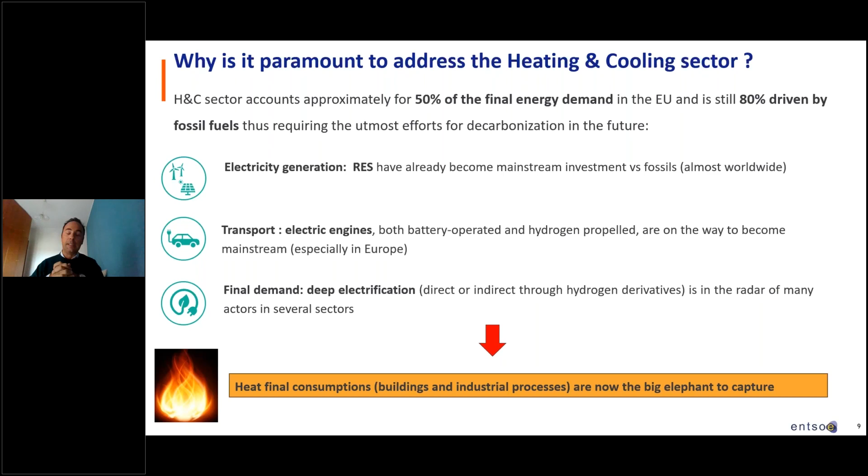If we move to the next slide, another important point I would like to highlight regards the synergy between the heating and cooling and the electricity sectors, also in terms of services needed by the power system, in particular for flexibility. If we put this under a future perspective of an integrated energy system, a system of systems for the future, we can see interactions between the power and heating sectors, in particular from electrification of heating systems, which implies electric load increase and load profile modification, but also opportunities in the form of flexibility provision through demand response and exploitation of the intrinsic thermal behaviour of heating and cooling systems. Thermal storage systems in specific applications can ensure medium-long term duration flexibility at the energy system level.

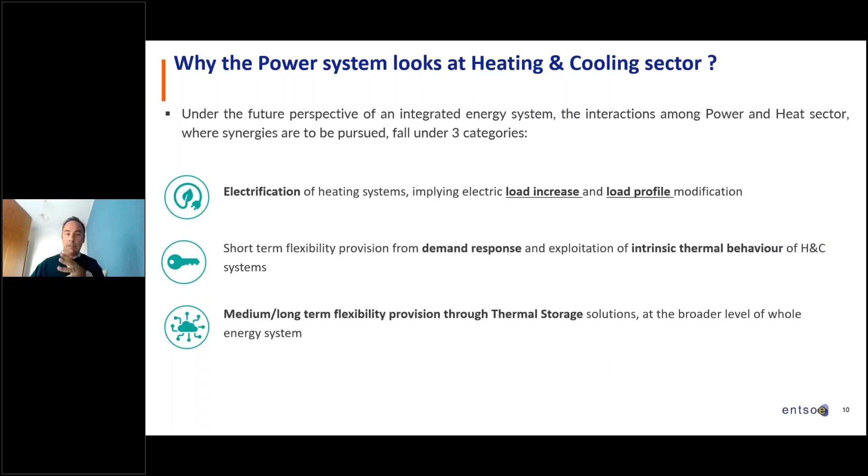If we move to the next slide, we have mentioned flexibility. As you can understand, one of the key points for the future is the contribution that such services will give to the system in terms of flexibility. In a full carbon neutral system, it will require large scale flexibility, both in terms of short and long duration flexibility. This is another aspect that will be further highlighted in the presentations that will come from the speakers ahead. But the point of flexibility for the future is something crucial that needs to be addressed.

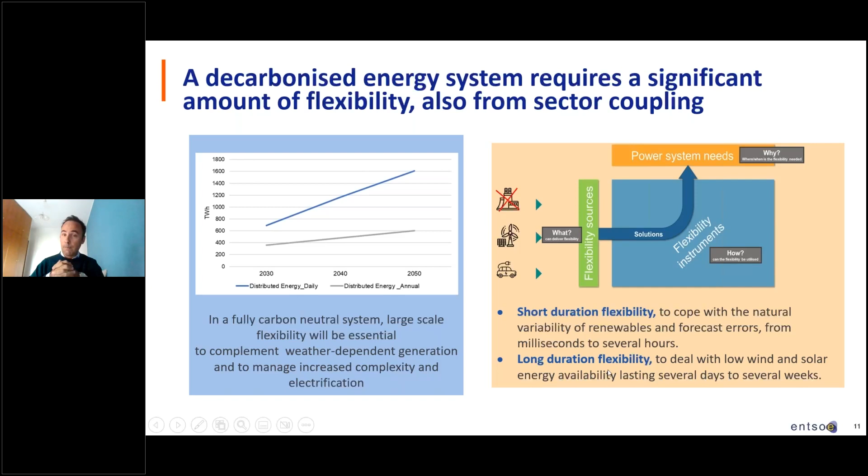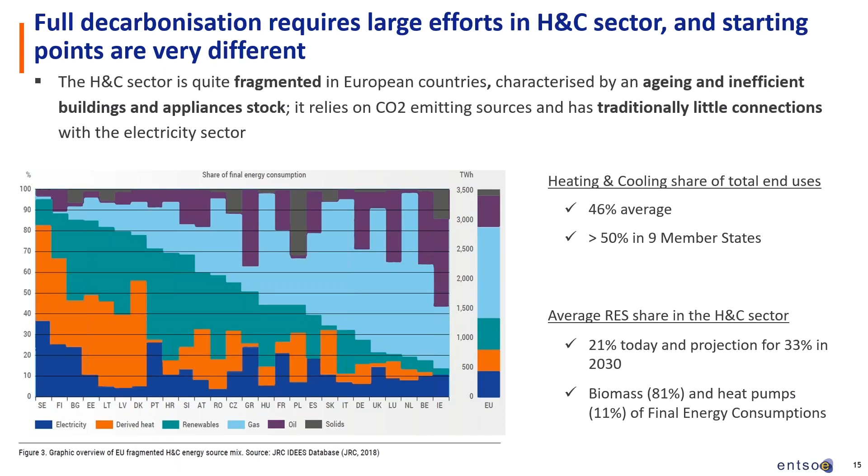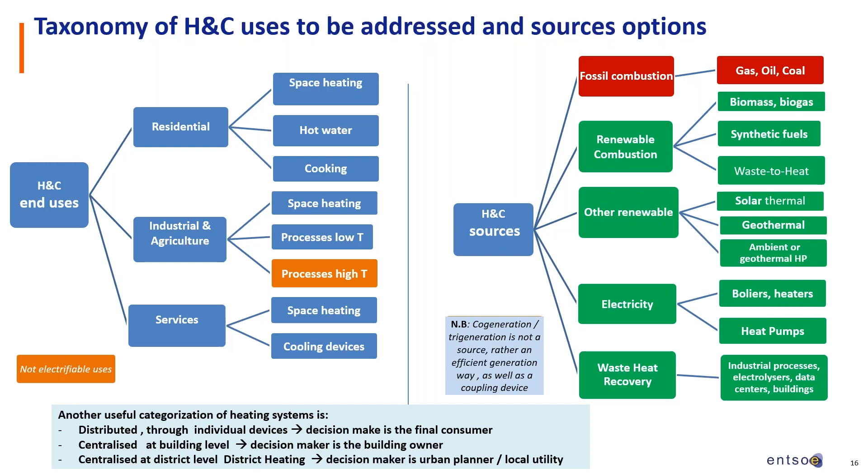In the position paper and some of the annexes, you will find a lot of data analytics about which final users and which sources, according to the previous taxonomy. We see that the two most important ones are space heating of buildings and industrial processes, which have very different characteristics, so they deserve different treatment and different processes for decarbonization.

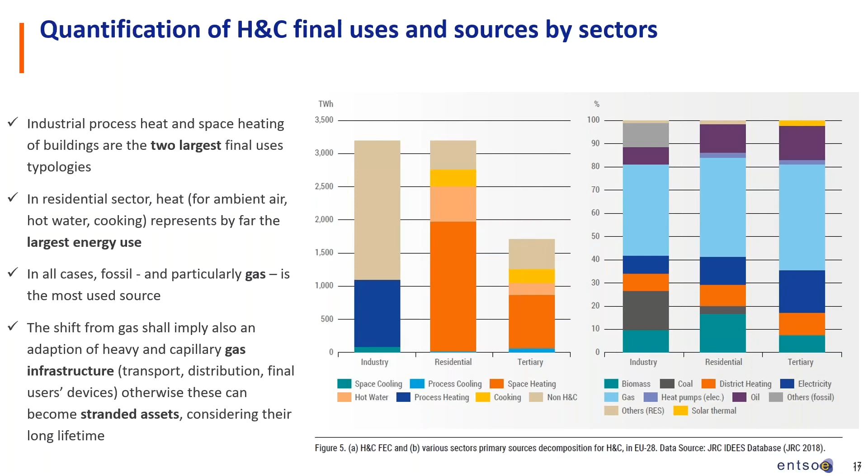In the residential sector, heat respect of cooling represents the largest energy use. We have to consider the starting point - fossil, particularly gas, in many countries which are heavily infrastructurally based with an important gas system. So passing from gas to electricity means not only switching the final device, but also transport, distribution, supply - the whole supply chain has to be changed, in a coordinated way to avoid stranded assets and achieve not only energy efficiency but also infrastructure efficiency.

We see different priorities in sequence for decarbonization. First is efficiency - there is still much efficiency in the heat sector to be harnessed. After this, use of thermal renewable sources, so you don't need energy conversion with related losses. After that, electrification, which is mostly what we're talking about today, because the other two may not directly impact the electric system. And for what cannot be electrified, use of hydrogen and its derivatives, especially for hard-to-abate industrial processes like those with high temperature.

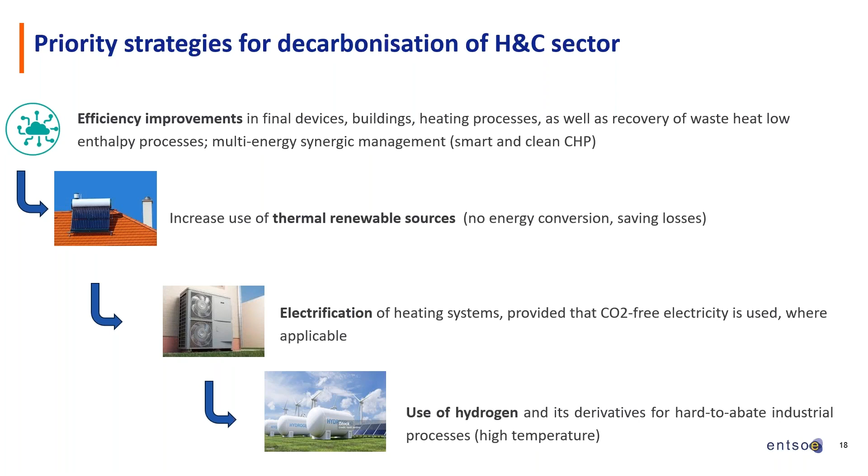Focusing now on electrification: first, coming from very different starting points, there is no solution which fits all, and there are also very different scenarios. For example, just think of the price of fossil gas, which is going up and down, and this is mostly, and in many cases, independent from the price of electricity. Of course, the ratio between the price of gas and electricity for the final user is very important to decide to shift.

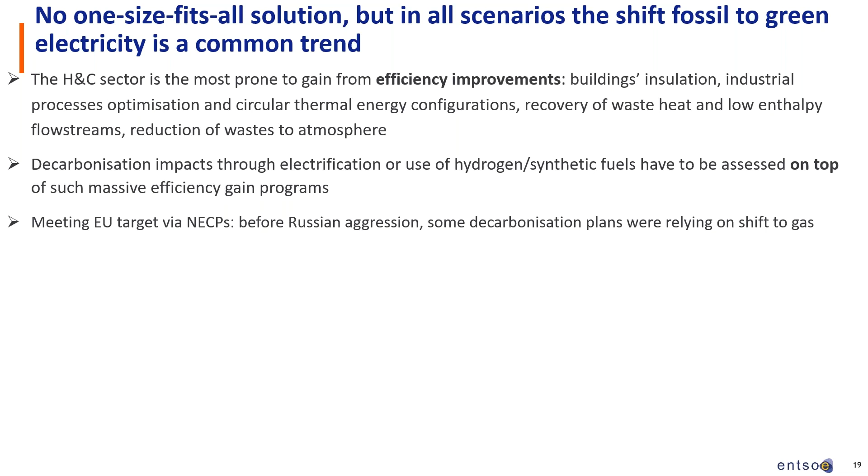But the efficiency improvement has to come first. There are already many directives and many incentives also at national level, especially for thermal insulation of buildings, but also on industrial processes optimization and use of waste energy, which is typically in the form of heat.

So not to forget that the shift to gas as a transitional point of the trajectory for decarbonization was seen before the European war from Russian aggression as a very smooth process, and now it has been accelerated.

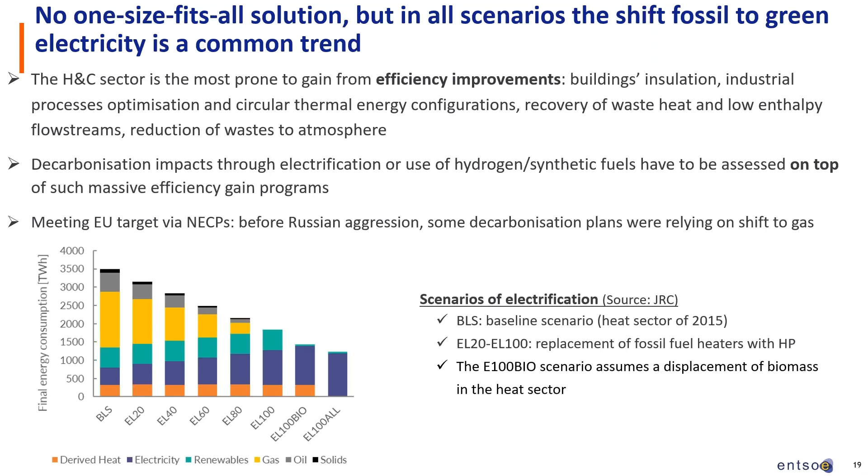So we're looking for synergies in energetic interaction between power and heat sector. They fall under three categories. First is electrification of heating systems, which means for us, for the grid operator, for the electricity system operator, an increase of load, very, very big increase, but also a modification of load profile.

So we will need grid reinforcement, load congestion management. But also on the other side, having a lot of new electric load, they can be a provider of flexibility, which is very much in need.

Both as demand response, responding to different prices of the final devices, but also as thermal storage, which is the second category. For long-term flexibility, there are not many sources. One of them is molecules, so hydrogen, but the other one, still in early stage, is thermal storage.

So the energy system as a whole is looking very much to this kind of long-term flexibility, in particular thermal storage. Third point is, again widening the view on the whole energy system, not only power system, we will have to combine in the most efficient way - efficient both in energy term and infrastructure term - all the different possibilities, all the different technologies, but also the use cases. There are many different use cases.

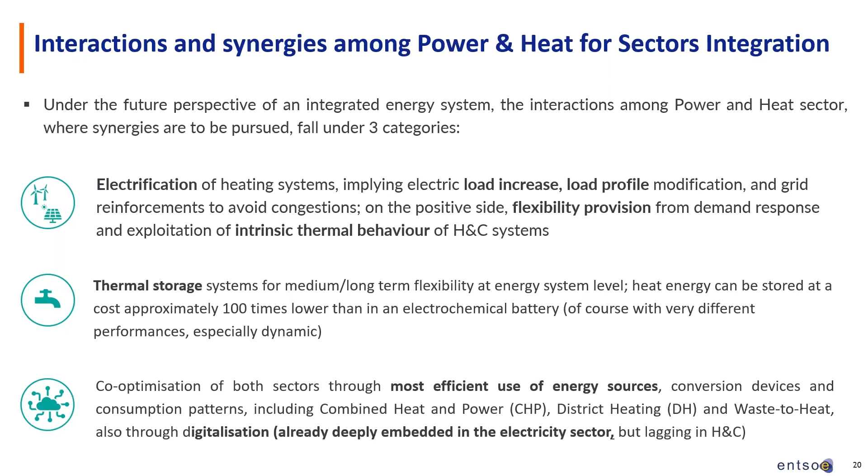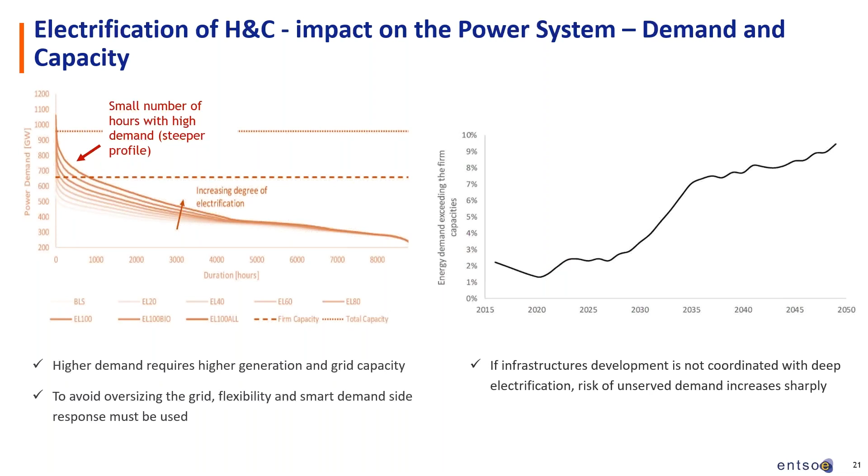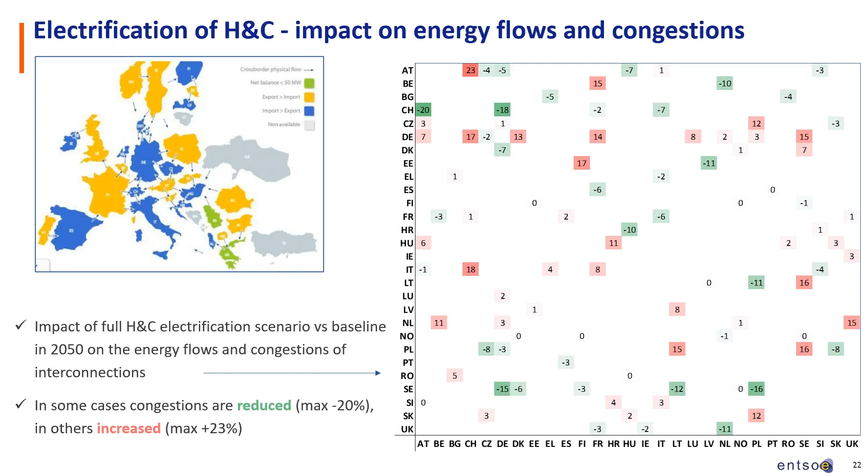So in the next slide, we can see that the flexibility has to come from win-win solutions. So the system gets flexibility, remunerates who is giving it, and this remuneration must cover all the capex and opex, and also maybe the giveaway of some freedom of use of your final device, be it smart charging of a vehicle or a heating system of a building.

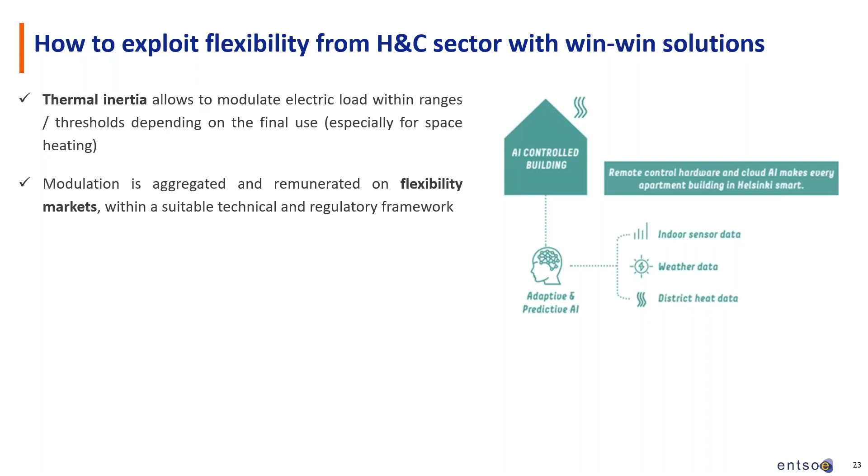Of course, I repeat this because it's very important: the devices have to be visible and controllable, so at least IoT, but also sophisticated digitalization platforms to allow final users and their aggregators to participate in a market, because all this flexibility shall be provided through market mechanisms.

And thermal storage, not only big ones but also locally, can provide an extra optimization of the income of the final user. And talking about thermal storage, next.

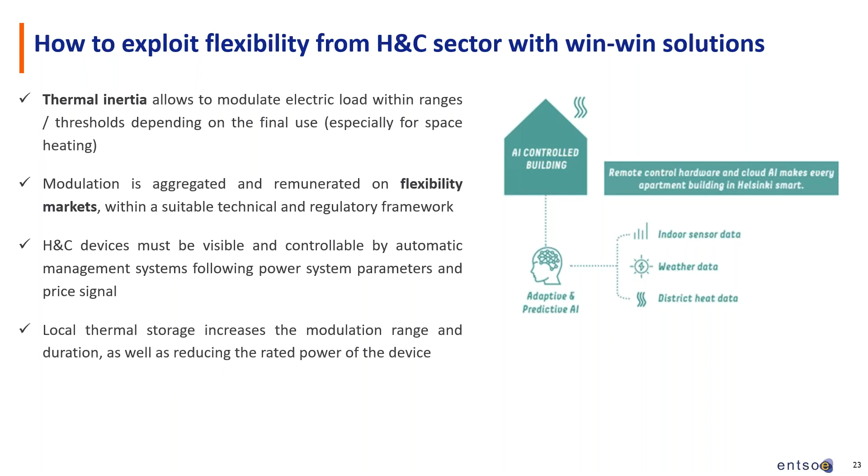In the position paper, we have analyzed all the different technical possibilities, technologies, but also the materials, and also different applications. Again, the use cases are quite different.

Storage can complement direct electrification. For example, very promising is the technology of thermochemical storage, which can have a density up to 20 times greater than sensible storage, and even comparing it to electrochemical, there are some advantages in energy terms, though not in dynamic characteristics. We need batteries, electrochemical, for fast response. We need thermochemical for longer time and larger quantities. So they are complementary, there is not a race between the two.

One point among the barriers represented here is that this can be applied to new buildings, which are very few in Europe, while retrofitting the existing built environment has a lot of practical barriers, from civil works to business case. This is for buildings. Instead, for industrial processes, there is more space for positive business cases, and this is a sector which has to be looked at.

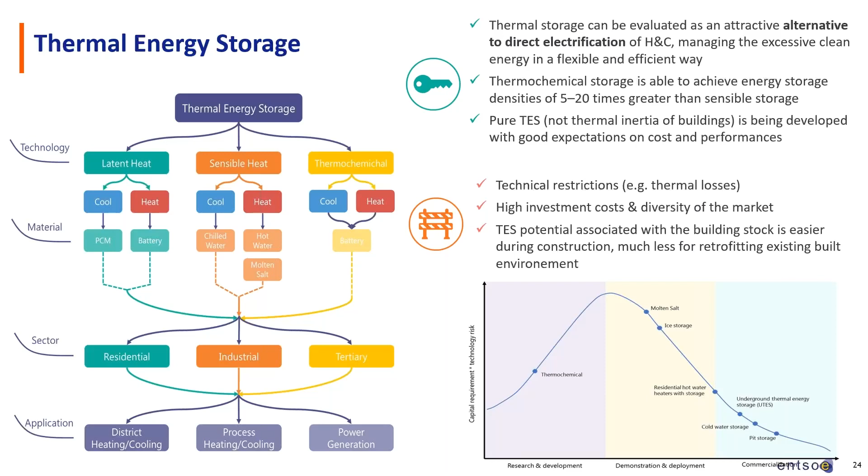In the next slide, on the right side, we see that the amount of flexibility of storage is increasing very much with the percentage of penetration of electric renewable sources. Since the target is to go to almost 100%, you can see from this graphic, which is logarithmic in the vertical scale, that we must count on an exponential deployment, which places issues of supply chain, of manufacturing, of human skills, but also the impact on the system.

It's not just that you plug them in, you have to change some operational philosophies as well. Just one hint on the other graphic: the main characteristic of thermal storage from the final use point of view is duration and temperature of discharge. So particularly for us, duration, but temperature of discharge is important for industrial processes.

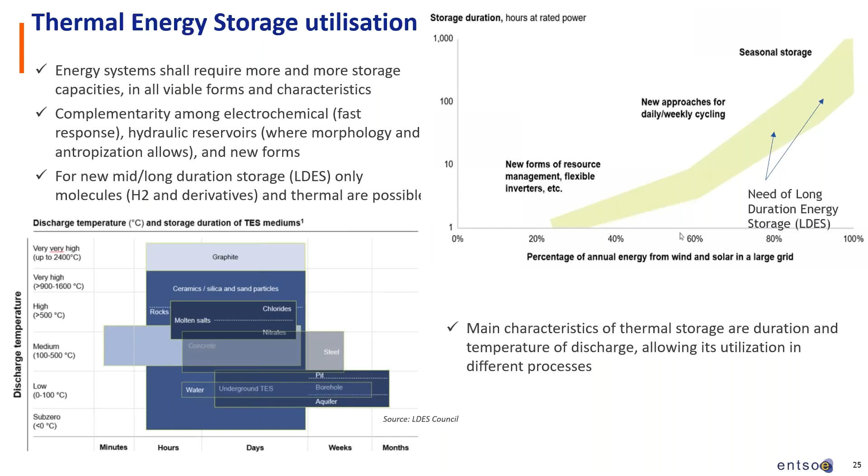Talking again about thermal storage, in this last slide dedicated to it, you can see on the right upper side a sort of bipole or quadrupole multi-energy device. Some of these devices do exist, and an example is given in the other graphic, which has both as input and as output electricity and heat.

So if you also have thermal storage inside, and other kinds of storage in the systems before and after this quadrupole, you can reach two kinds of decoupling of energy input from energy output. Shifting in time, this is a sort of thermal battery, which is very important for the load profile, because in the future the system will have to follow the production profile from intermittent natural sources.

The second decoupling is to decouple the electricity profile from the heat profile. If you can have such a device, you can really play around with controllable energy conversion, both in input and output, and reach the most efficient outcome.

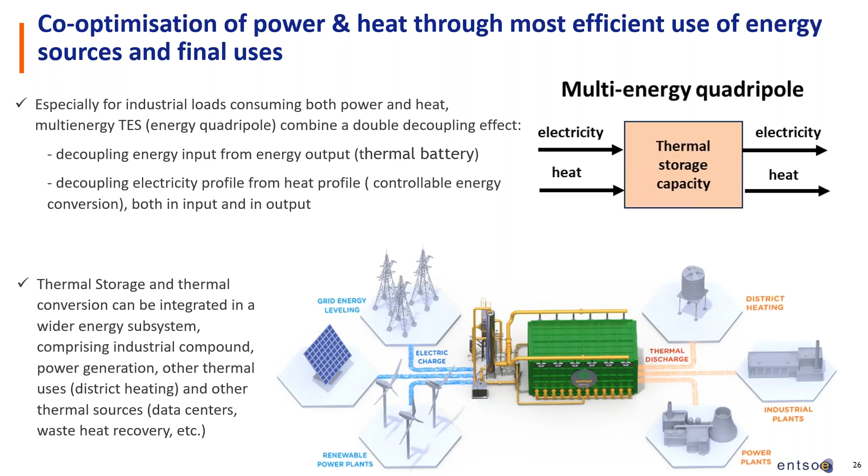So coming to a close, some key messages. First of all, there are different paces and pathways. Everybody agrees, there is consensus on the need for decarbonization, but there will be different paces and different pathways.

Another analysis in the position paper is that some countries have an electric system which could already, with not many reinforcements, accept almost full electrification, while others will need to do large reinforcements. So there is need for coordination of the pace, the rhythm of electrification and the upgrading of the infrastructure.

We have seen that demand side flexibility is paramount, and thermal storage is very much looked at for long duration. Its potential today is within the built stock, the built environment. There are many hundreds of millions of buildings, residential, but also service and industrial, which need heating, not only for process. This is a huge sector to be addressed also with incentives.

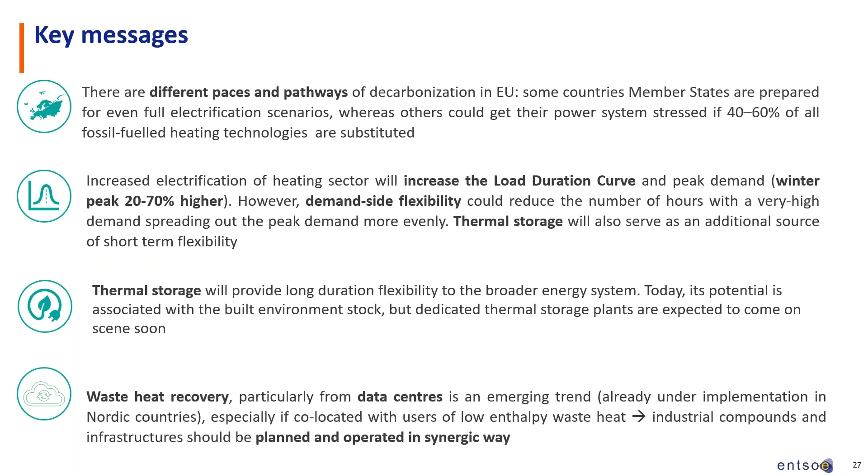And let's remind that there is a lot of waste heat recovery. For example, data centers are being built, very big ones, so they have constant heat production. Actually, the electricity consumption is mostly for cooling them. Having the possibility to recover this waste heat is mostly a question of location, because you cannot transport heat as easily as you transport molecules or electricity.

So even enlarging the coordination of infrastructure with industrial plants, industrial compounds, but even urban and territorial development, can allow this recovery. And I think this is the last key recommendation: we have to look at the consumer.

The business model has to be consumer focused, because in the end it would be them to decide and to pay for this big shift to decarbonize the system. And this has to be backed by markets for flexibility, for example, but not only, and a larger regulatory framework.

So installing a new type of heating device is not viable in the same way according to the final use cases. An assessment of compatibility has to be done. It depends on how your building is done, how your present heating system is done.

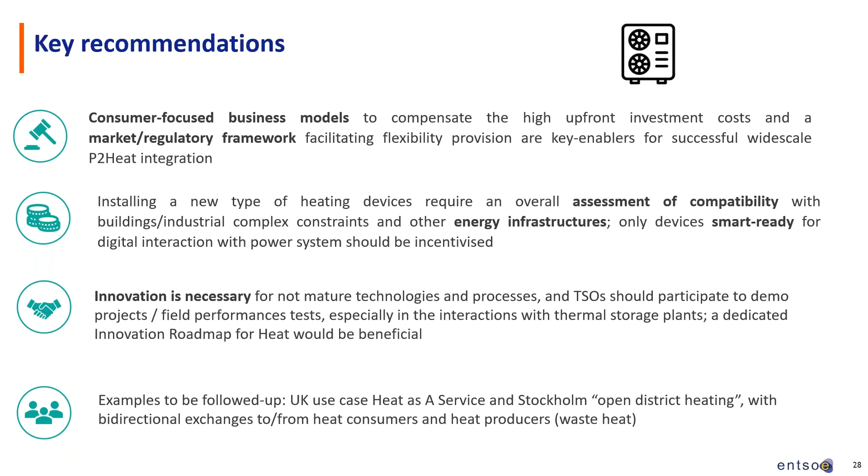If you have insulation enough, for example, the heat pump—and I'm really happy to hear about heat pumps more in detail in the following presentation—are very much efficient, but they have many barriers in some cases, in some circumstances. There are barriers, and the initial cost to be bought.

So the business cases, in some cases are easy, are positive, in some they are not. So there will be need of innovation, but also need of incentive. From our grid operator point of view, we think that incentive should be there in particular for kind of devices, in particular heat pumps, which are ready for being visible and controllable. So we could call them smart grid ready.

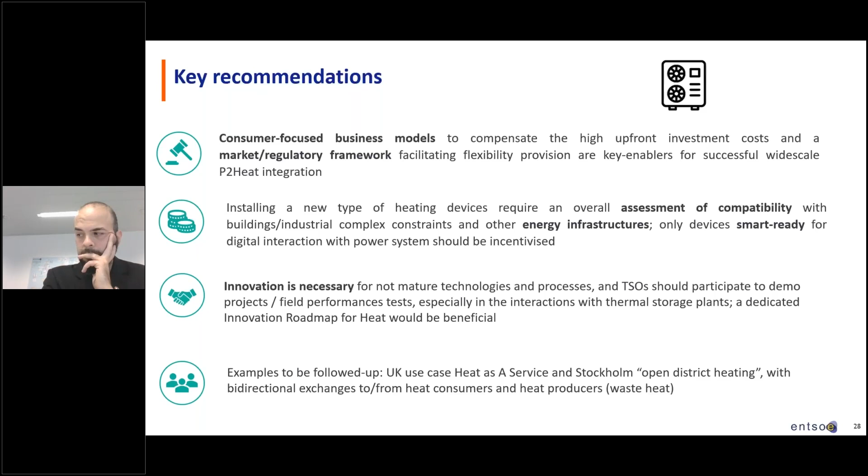In the position paper, there are also an appendix with examples. For example, one is in UK, heat as a service. Another interesting one was in Sweden, where a district heating was not only giving heat but also receiving heat, so creating at least locally a sort of market. And I think I will stop here. Sorry for not sharing my video.

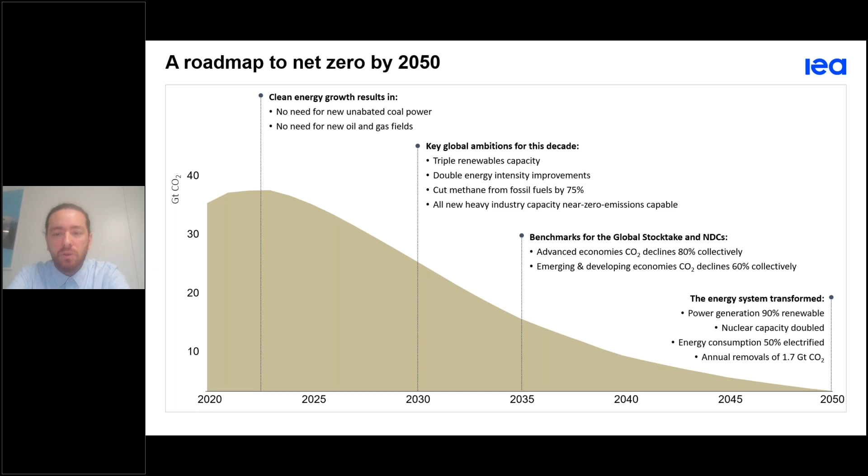By 2035, the target implies advanced economies decline emissions by 80%, while emerging and developing economies decline by 60%. As a consequence, by 2050 we foresee in this scenario a completely transformed energy system, with power generation 90% renewable, over 70% wind and solar, nuclear capacity doubled, and a large amount of electrification with 50% of final consumption electrified, and some carbon dioxide removals of 1.7 gigatons of CO2 per year.

So if we can move to the next slide, we can jump into the space and water heating analysis in this net zero scenario. What we can see is that in the last decade, at global scale, emissions related to space and water heating have been quite flat, around 4 gigatons of CO2 per year. A bit less than half of them are indirect emissions coming from power and district heating grids, but a large amount are direct emissions coming from combustion in buildings, with natural gas being a big part of it.

The big challenge is that in this scenario, in the coming seven years, by 2030, emissions would need to be almost half indirect and half direct. Direct emissions being around 1.2 gigatons of CO2 by 2030, primarily via switching from natural gas, oil, and fossil fuels to electricity and clean district heat. So it's a big change in front of us.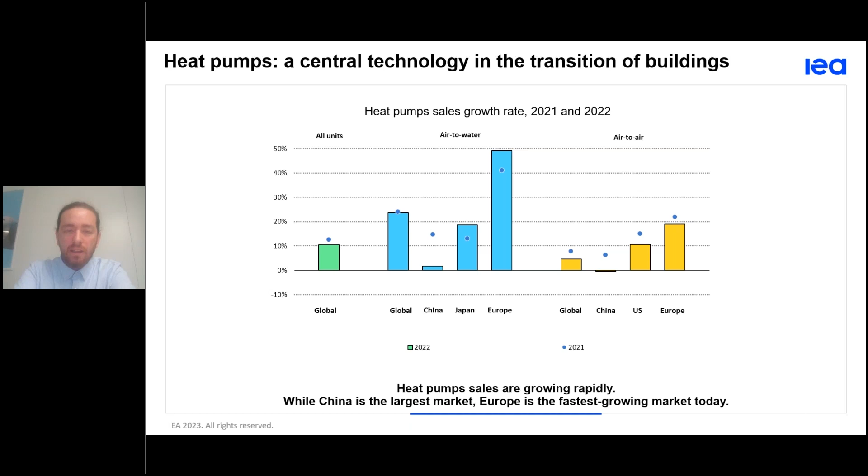Just to close this part on the building side, moving to the next slide, we have some numbers on manufacturing. In 2021, when we first did this analysis, manufacturing capacity worldwide was around 100 gigawatts.

Last year, 2022, this was 120, so there was an increase there. If we take announcement and expansion plans from manufacturers, we see that there's around 50 gigawatts of capacity in the pipeline, mostly coming from Europe. Actually, over 90% of this pipeline is from Europe, from around 4 billion euros already well announced by different manufacturers. But still, this is far away from what we would need in this net zero scenario, because manufacturing capacity would need to be around 400 gigawatts.

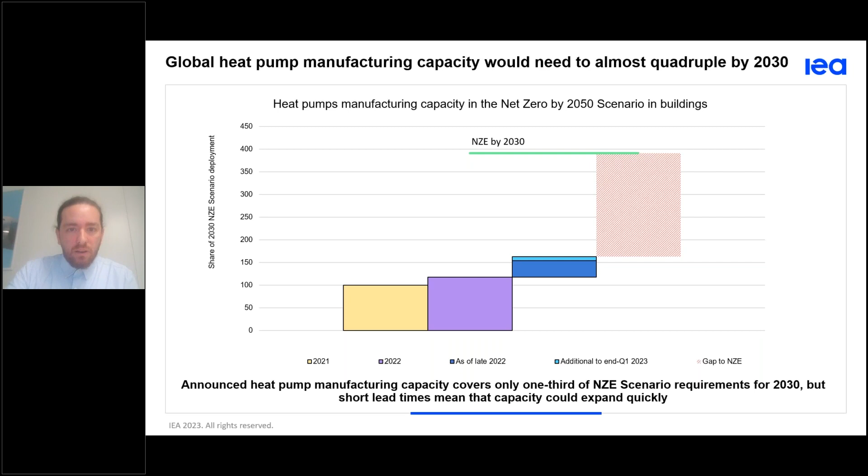If we can go to the next slide, please. Just a few slides to conclude on industry and the role heat pumps in particular could play. First, as most of you know, temperatures above 200 degrees are tricky for heat pumps to implement. Direct electrification, as of today, is generally preferable. There are some technologies already being used or developed, and innovation could bring heat pumps to these levels, so R&D and innovation is definitely needed. But in low temperatures, heat pumps definitely have a big role to play in displacing fossil fuels.

What you can see here is in one of our scenarios, the announced pledges scenario, where all national targets and pledges are met on time and in full, the share of global industrial process heat demand is set to increase, and 40% of this is expected to remain below 200 degrees, so in an area which is in principle suitable for heat pumps.

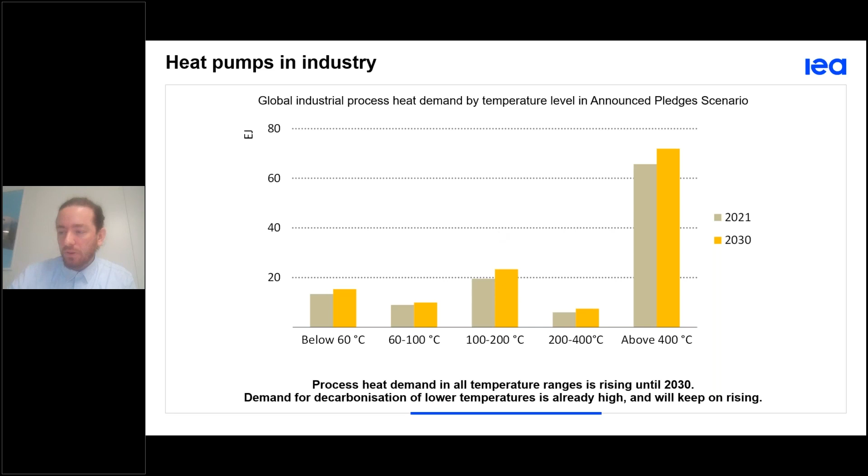In the next slide, just a short example we also published a couple of years ago, zooming into Europe: the fact that there's process heat at these temperatures doesn't mean heat pumps could be used directly. Of course, there are some caveats. In the paper industry, our analysis showed that around 65% of process heat could in principle be met by heat pumps, with substantial changes in the systems.

In the food industry, around 40%, mainly in temperatures below 150 degrees, because there's low availability of waste heat. And in the chemical industry, it's more tricky because temperatures are typically very high, but still heat pumps could reach around a quarter of the potential, and waste heat availability is higher here, so in theory there's also a good match.

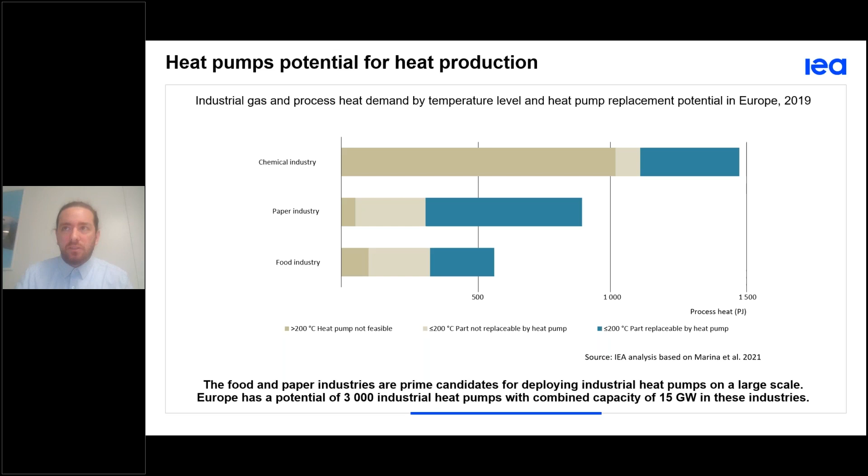So in this quick example, you can see here in Europe, in these three industries, around 30% could be met by heat pumps available today. This would mean a combined capacity of 15 gigawatts and around 3,000 industrial heat pumps only in these few sectors, just to put these numbers in context.

Just to conclude, a couple of slides on cost, because when we talk about heat pumps in industry, cost is also one of the issues, as in the building sector. But in the case of industry, operation costs are typically more relevant. As you can see in the figure, capital expenditures for gas boilers versus heat pumps are not a big part of it. But current market designs typically may complicate the penetration of heat pumps.

Finland, which you can see below, is kind of an exception, with an energy cost environment that is positive, with low taxes for electricity, which made heat pump penetration more favorable. We saw there that even in the last few years, heat pumps were cost competitive compared to gas boilers, but in Germany this was not the case, partly because of higher taxes and levies on electricity used in industry compared to gas boilers.

But if you could click one time, we could see the evolution of this comparison in 2021 after the price shocks. Even in Germany, and even with this larger proportion of tax and levies, heat pumps during this period were life cycle competitive in this analysis.

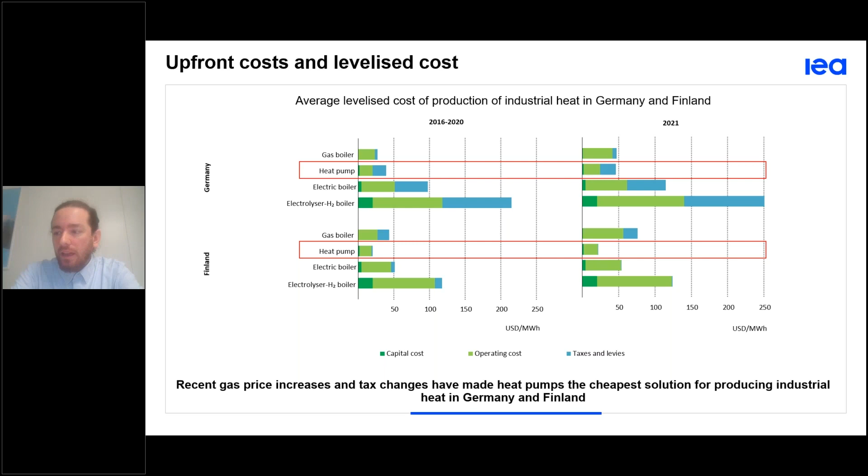And just before closing, if we can close quickly with the next slide, very quickly to mention that these local specificities have a very deep impact. Just to see, this is a projection in our announced pledges scenario by 2030, with higher penetration of renewables in the grid and lower electricity costs.

Projections show that in a few years, if these targets and ambitions are met, heat pumps and other low carbon heat sources like solar thermal or bioenergy could be cost competitive in a wide range of countries versus coal and natural gas, which today is not the case in many areas.

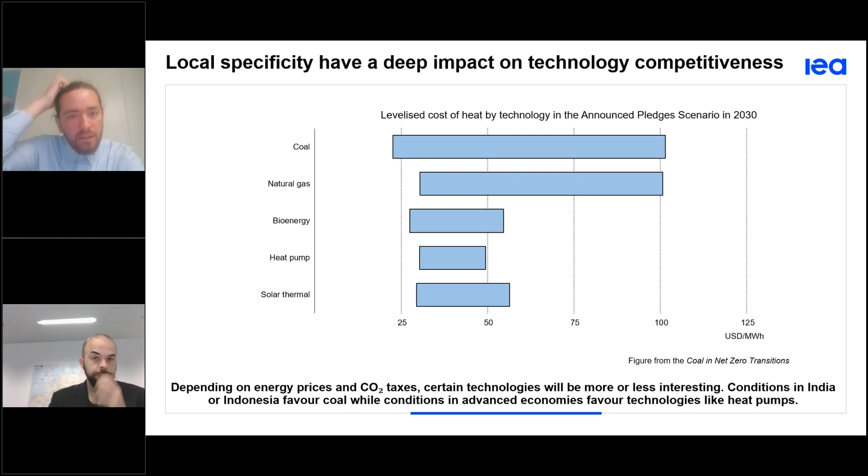With this, because I think I'm over time, I'll close on the next slide, which people can check offline, but just to mention a couple of publications we've published in the last couple of years related to electrification, heat pumps, our net zero roadmap, and yesterday we also published a special report on grids, which can be really interesting for the topic.

And in one week, the World Energy Outlook will be launched, which for sure will have some insights too. So that was all I have in the slides. Thank you very much for the attention and the time. Any questions, happy to answer, either here or by mail or LinkedIn or any means.

Thank you, Rafael. Thank you very much. I think it was a very good presentation with a lot of interesting numbers from industry, market, scenarios. I think you captured different aspects there. That's why we have some interesting questions coming in, so we can take maybe a couple of them, more focusing on the challenges part.

So one question, for instance, is that most of these heat pumps are practically connected to the low voltage network, which in some cases is not adequate to absorb this penetration. So when it comes to replacing cables in an efficient way or in a timely fashion, are there any suggestions to overcome such challenges?

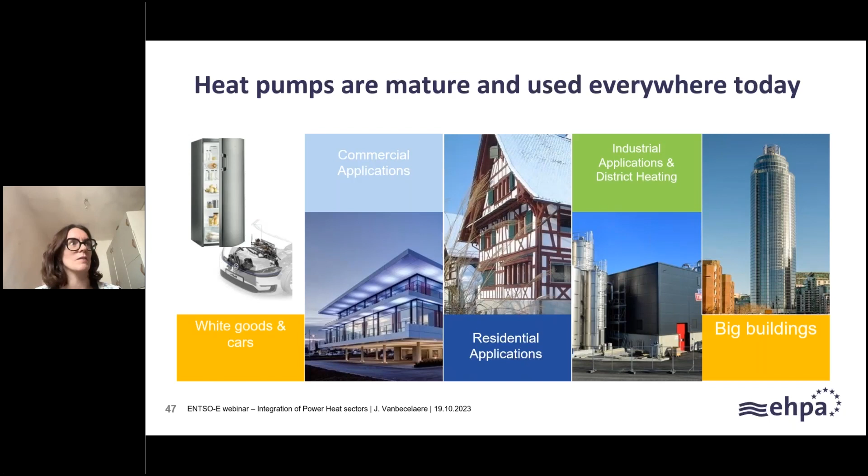So it's really a very steep growth, but I have to counter a bit what Rafael pointed out. We have heard from our members, many of them heat pump manufacturers, that this year the growth has slowed down, a bit of a dip. Many of them had invested a lot in additional factories and production lines for heat pumps because of this high growth, with 5 billion in investments announced from different manufacturers.

But this year, because of inflation and also because of the political backlash, for example in Germany, we've seen a very heated debate around heating and heat pumps. This has caused quite some doubts, and demand has slowed down a bit. So we expect that the increase this year will not be as high as in previous years.

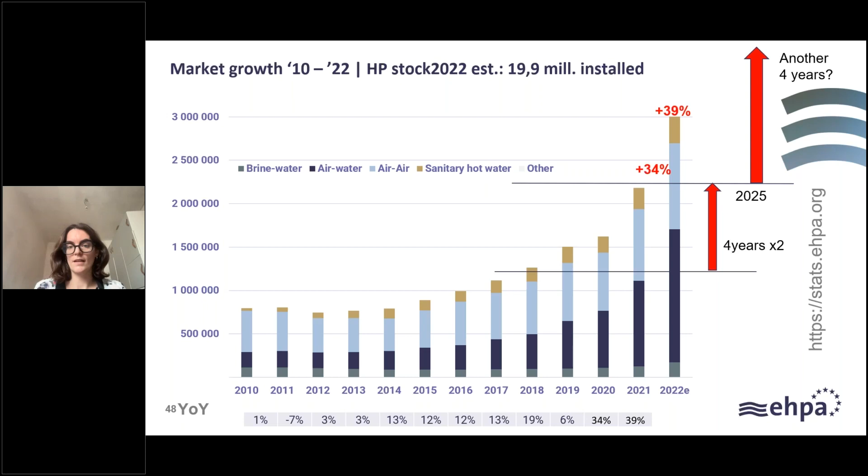On the next slide, if we go back in time and consider today's topic of energy system integration and the importance of heat pumps in that regard, a very important publication was the Energy System Integration Strategy of the EU in 2020. It looked at four points, and in three of them heat pumps play a very important role.

The energy system integration strategy aimed at creating a more circular energy system, and heat pumps are very important for that, as already highlighted, because they can use waste or excess heat as a source again to heat other processes and buildings.

Secondly, the use of electricity from renewables should be accelerated, and heat pumps are the perfect way to do that, replacing gas or fossil fuels with electricity from renewables. Thirdly, the aim was to adapt energy markets and infrastructure to a more complex and integrated energy system, and heat pumps are important here too because they can offer demand response and flexibility to the system.

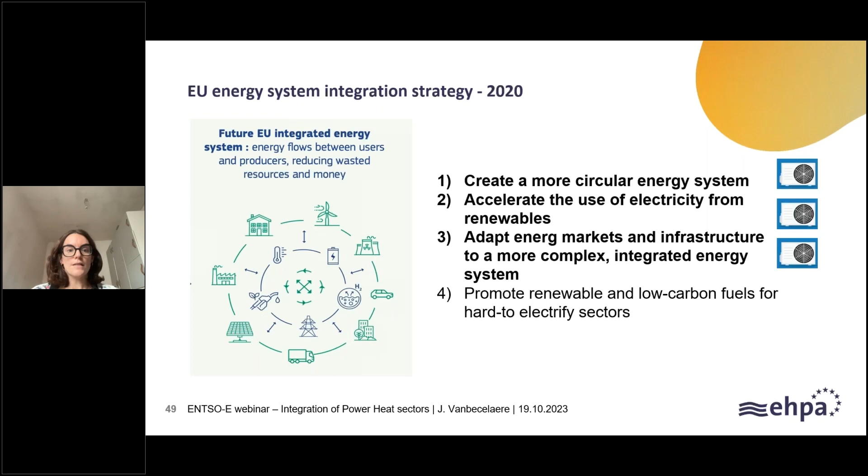If we go to the next slide, you can see that in 2022 we had the Russian invasion of Ukraine, and we saw a very steep increase in heat pump demand, partly because of the EU's reaction to this invasion.

And suddenly heat pumps were put really on the forefront, also literally, of this document, because suddenly they were very important as well for energy security. As the IEA says today, heating buildings represents a third of the EU's gas demand, and in 2025, with heat pumps, gas demand could be reduced by 7 billion cubic meters.

So heat pumps play a very important role for this energy security. In this RePowerEU document, there were very ambitious targets. They put targets for hydronic heat pumps only initially: 10 million additional by 2027 and 30 million by 2030. But that's not the whole heat pump market, there's more than hydronic heat pumps alone. So if you extrapolate to the whole market, this would lead to 60 million heat pumps by 2030.

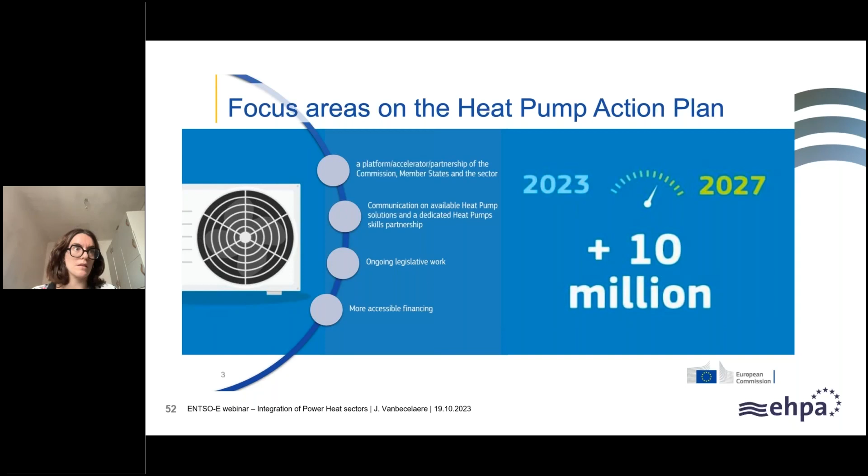If you then go to the next slide, I want to shift a bit more to the topic of today, how important heat pumps are to integrate the energy system, and I want to focus on 4 aspects, which have also already been highlighted in the different presentations before.

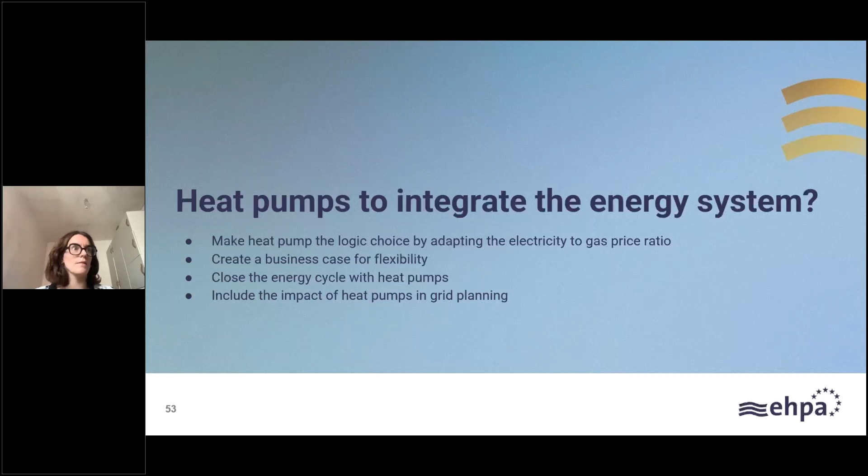The first one is indeed to make heat pumps faster rolled out. We have to adapt this electricity to gas price ratio. So this you can see on the next slide. So here, it was mentioned by Rafael. So you have, of course, a heat pump, there's a higher capex, so a higher investment cost at the start, but because they are so much more efficient than a fossil fuel boiler, so 3 to 5 times more efficient, normally they should become profitable very soon because you pay a much lower opex.

But we see that in many countries, the electricity to gas price ratio is very high. So electricity prices are in some countries more than 3.5 times the gas price. So then, yeah, this business case doesn't add up anymore. So what we recommend as EHPA is to have an electricity to gas price ratio of around 2, which means that your electricity price cannot be more than double the gas price, and that should be enough for end consumers to see quickly enough a result on their energy bills of the heat pump.

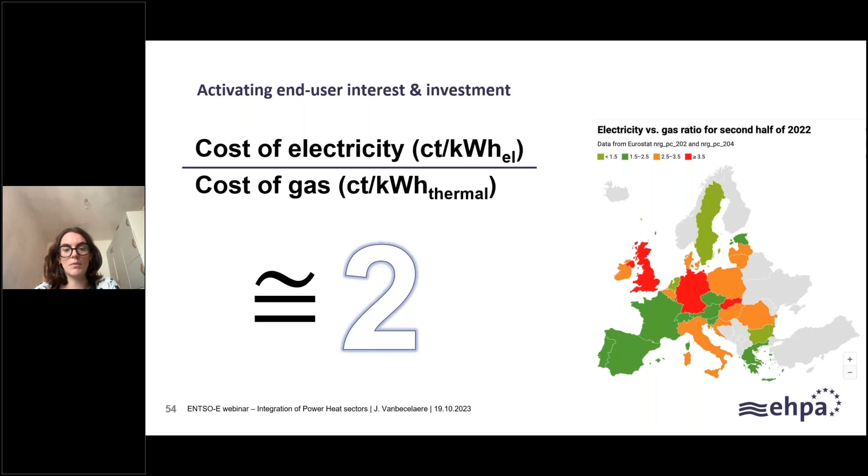If you then go to the next slide, another very important aspect for heat pumps to really integrate the energy system is, of course, to unlock the flexibility potential that they can offer. And for that, one of the things that was mentioned by Antonio is the fact that they should be smart grid ready. But that's actually, for us, not really the issue, because most of the heat pumps are smart grid ready - the technology is there. The devices themselves, they are smart grid ready, but it's more the regulation and the legislation.

In many countries, it's not possible yet to have flexible contracts. For example, for myself, my own heat pump here in Brussels, I do not have the option to use it in a flexible way and to get also a reward for this flexibility. So on this map, you see in which countries the electricity market design was implemented in 2022, and you see that this is not yet the case in all member states.

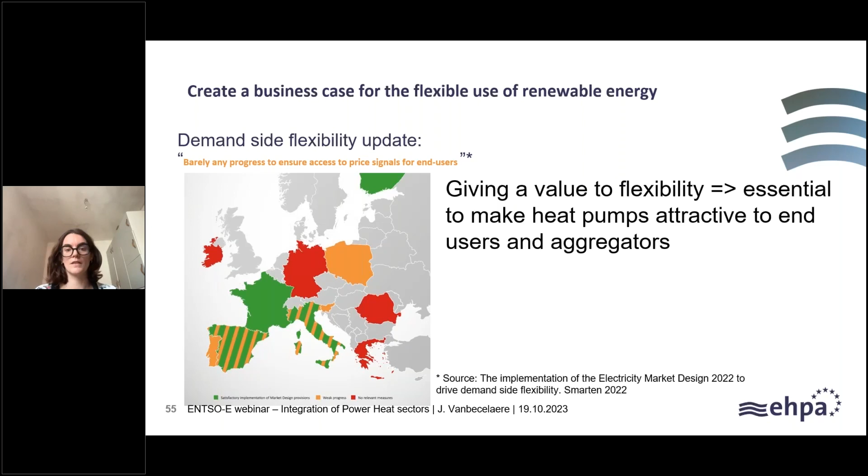So there really should be price signals for end users to really unlock this flexibility. If you then go to the next slide, you see if we have a lower...

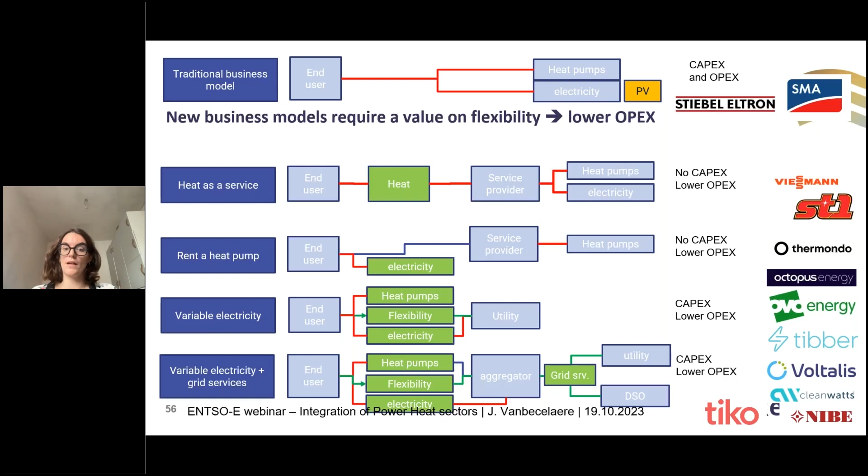If we have this value to flexibility, this will also lead to more different types of business models that require this flexibility or make use of it. So you have now different types available. I will not go through the details of these business models, but what we hope or expect is that if the OPEX goes down, more and more of these business models will occur, and this will also lead to lower capex and a higher uptake of heat pumps.

If you then move to the next slide, this is another aspect which has already been mentioned. Heat pumps are crucial to close the energy cycles. What does that mean? Well, wherever you have cooling, you have waste heat or excess heat, and heat pumps are ideal to use that again as a source in another part of, for example, an industrial heat pump, an industrial process.

But it can also be done, for example, in a city where you have a lot of cooling, like a supermarket, where you have excess heat from the chillers on the roof. This heat can be used to heat the apartments around the supermarket. So this can also be done in cities, and not only in industrial processes.

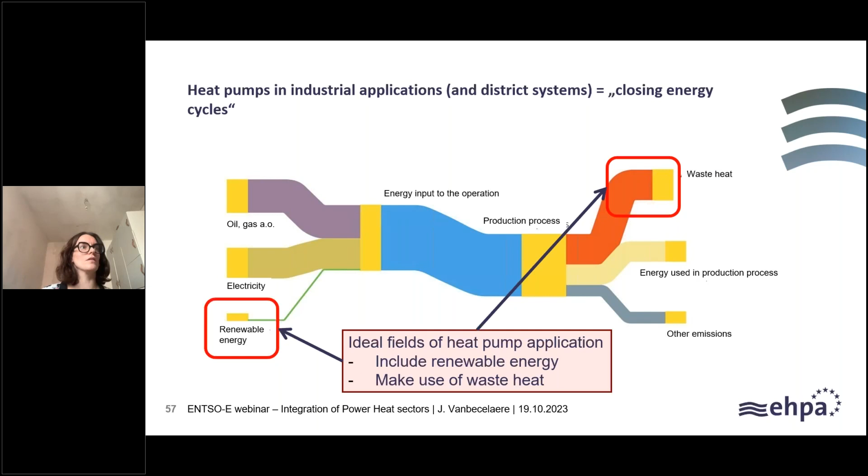If you can switch to the next slide. So it was already mentioned by Rafael, there's a very, very high potential for using heat pumps in industrial processes. So what we say is that industrial heat demand up to 200 degrees is heat pumpable, as we say, and that's now 37%. So 37% of the industrial heat demand is below 200 degrees.

And if we would put in all of that potential for industrial heat pumps, then we would have to install 300 megawatts per month until 2050 to arrive at 105 gigawatts.

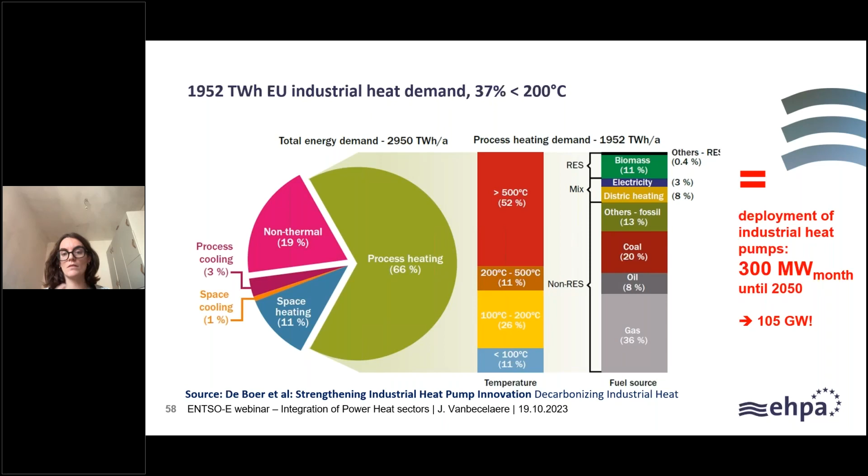So the potential is really big, but there's often still a lack of knowledge. Often the people in the factories are not yet aware enough of the potential of industrial heat pumps. Often you still have these cheaper fossil installations being used. Also, many technicians are wondering, do we need to make a lot of changes in the industrial process to implement this, and so on. So there's still a need for a lot of additional information, and then also, of course, the grid connections for these industrial heat pumps - that should be ensured as well.

And then a last slide - something that we hear a lot is, of course, the grids will not cope with all these additional heat pumps, the lights will go out. But we actually see quite a lot of analysis that say more heat pumps actually means more stable demand, because they offer this demand side flexibility.

And this leads to new business models, and this means also new players in the market and more heat pumps. So a few years ago, we launched this letter with a large group of utilities and DSOs that confirmed heat pumps are not a threat to the grid, but actually a support to the grid, and they can offer this flexibility. But for that to happen, you need to unlock it by giving it a value.

And then very important, I think, also in this setup of speakers with ENTSO-E and so on - it's very important that the grid planning process really recognizes the impact of electrification and looks at the potential of all of these heat pumps, not only how it could impact the grid in a negative way, but how it will support the grid.

So we had our forum a few weeks ago, and one of the speakers said, well, the question is not, will the lights stay on with so many more million heat pumps? No, the question is rather, will the lights stay on without all these heat pumps? Because of the flexibility that they can offer. So I think that's a good way to end and to keep in mind for the discussion. Thank you.

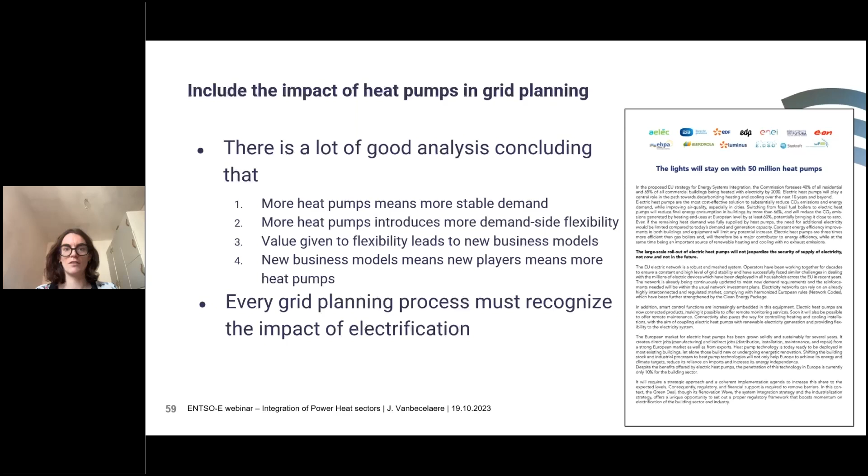Thank you very much, Jozefien, and thank you because actually, your presentation answered a few questions that we have been receiving so far. So thank you very much. I said no Q&As, but I will only take one small one because it has to do with clarification.

In the market growth slide that you saw, is it the aggregation of all industries, that number there?

That's a good point, I actually wanted to mention it but forgot. It's actually mainly residential heat pumps and also a big share of commercial ones. What we are working on at the moment is to also include numbers on industrial heat pumps, but it's a bit more tricky because for residential heat pumps we have national associations that gather this data and we assemble it. For industrial heat pumps, we need to go via the manufacturers themselves. We are in the process because it's super important to have that data as well, but right now we don't have it.

Okay, thank you for this clarification. Without any further delay, we can move forward with Pauline Lucas, Policy Director from Euroheat and Power, continuing this nice set of presentations. Pauline, the floor is yours. Thank you, Yanis, very happy to be here today for this important conversation.

We can already go to the next slide. So the great strength of district heating is that we are an infrastructure, as we schematize here, and we can combine and optimize resources depending on what is locally available. Currently we serve 67 million EU consumers, so we are indeed a mature technology and actually quite ancient in terms of technology. We have above 17,000 networks that represent 12% of the EU heat market.

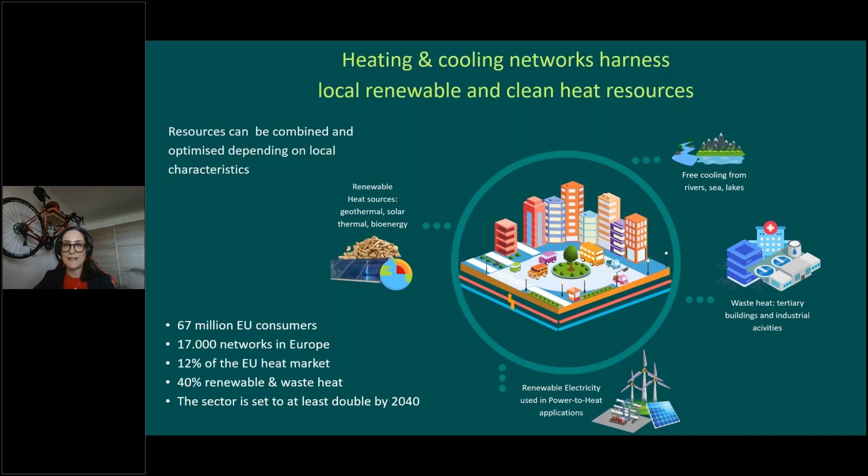There's a slight delay, next slide please. Thank you. So we currently have already 40% renewable and waste heat in our mix.

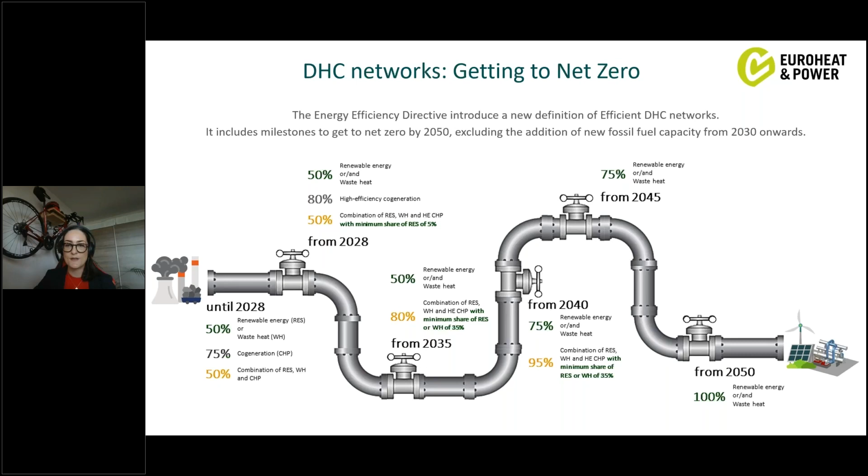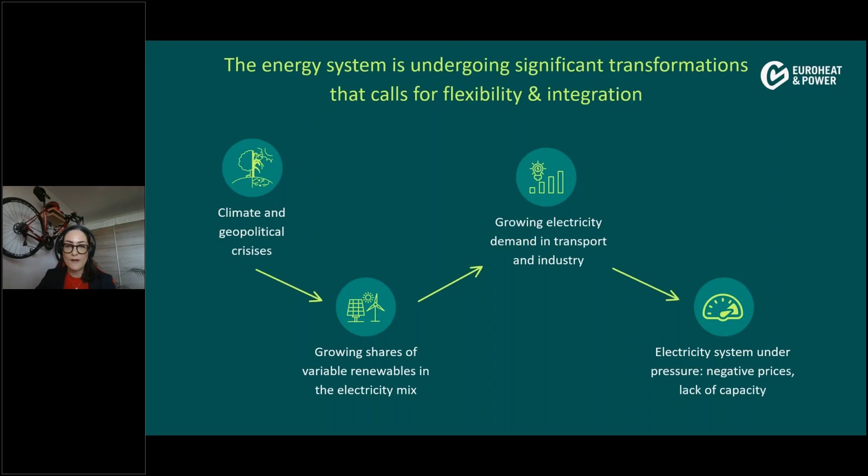So today we're talking about flexibility and integration, and I will enter in more detail into what it represents and what the DHC sector has to bring into this equation. It's true, and as already demonstrated by all the speakers, that our energy system is undergoing significant transformation. No need to recall that we are undergoing a dual crisis, both climate and geopolitical, which has triggered a lot of changes towards a growing share of renewables in general, but obviously the variable renewables represented by solar and wind. On the other side, we also have a growing demand for electricity, and this is putting pressure on the grid. If you zoom in on the next slide, please.

And why it is important is because the DHC network will have a dual role. On the one hand, it will absorb this excess renewable electricity that cannot be consumed by a sector because there is no demand at the time when it's produced.

And it will also be able to either consume this electricity or store it. We have already extensively discussed the thermal storage and the importance of this technology, but it will also help free up this renewable electricity, as not all the mix of the district heating networks will be electrified. We will still, as Antonio showed, rely largely on thermal heat sources.

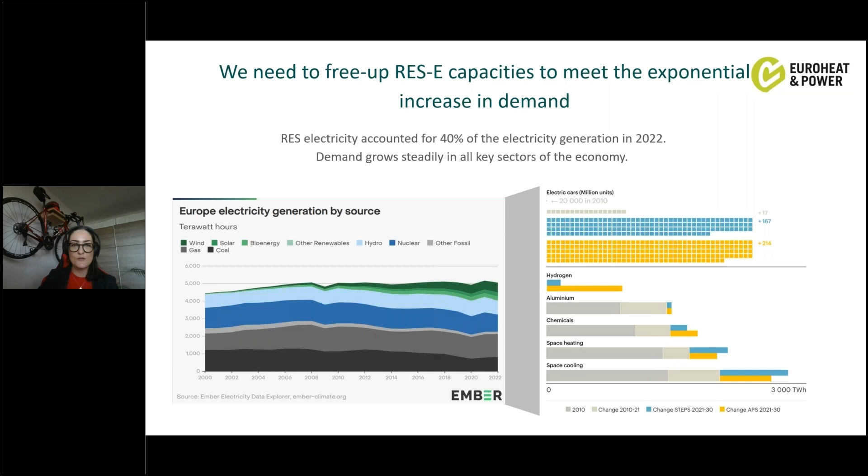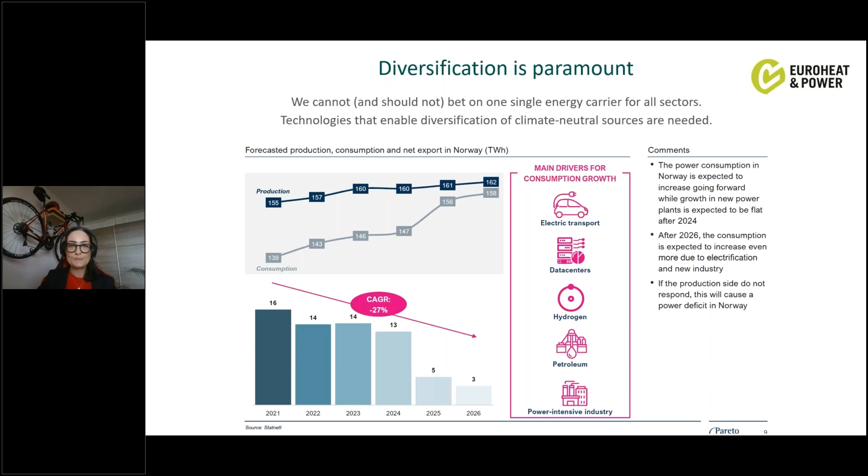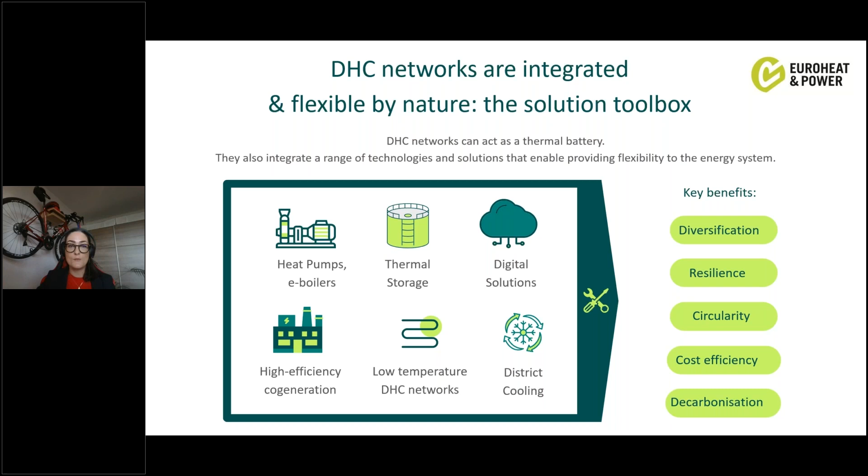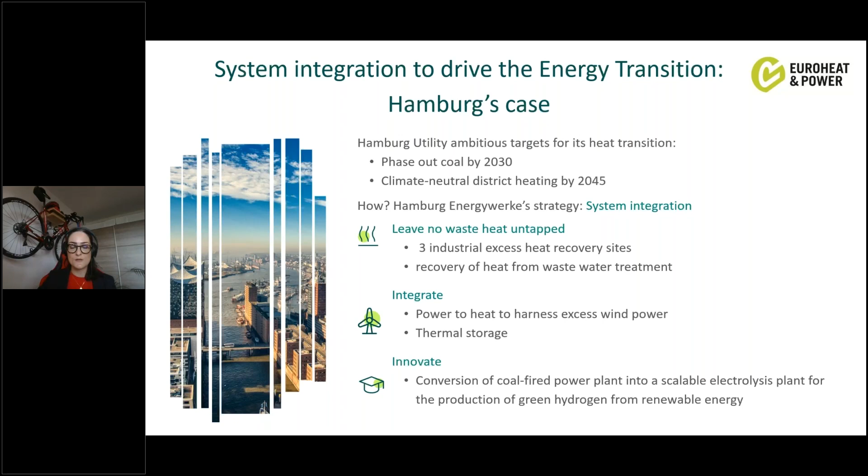And the last point, more innovative, they will convert a coal-fired plant into an electrolysis plant for the production of green hydrogen. So that's also interesting because Germany is considering hydrogen in its mix, and you can also, from electrolysis, recover the waste heat. So it's fully circular. If we go to the next slide.

After going into one concrete example, I wanted to just give a very brief overview of the interesting steps towards system integration brought by the Fit for 55 package.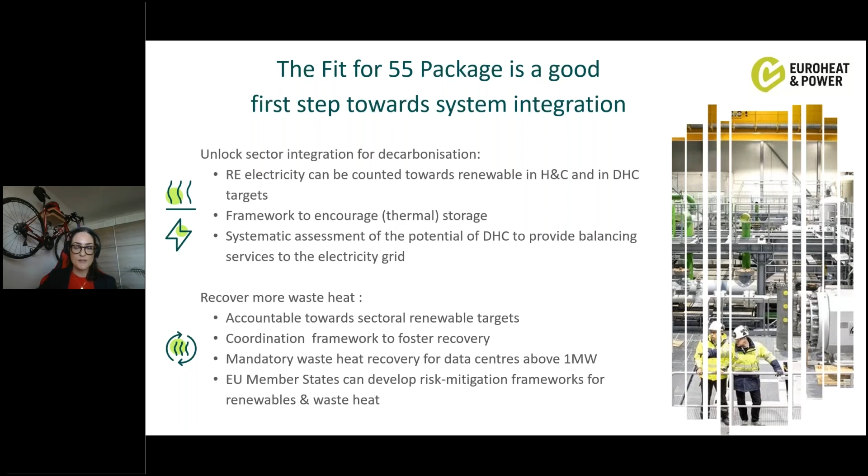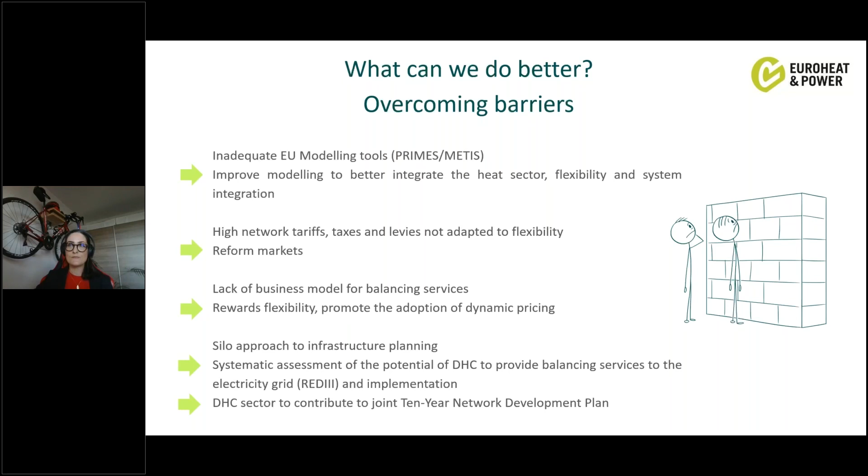If we go to the last slide—so what more can we do? There are indeed opportunities for better system integration, and they are not very far away, at least the short-term ones. The Commission is planning a communication on an action plan to facilitate grid rollout. Of course, this is mostly to address power grids, but we would love to see some elements to promote sector integration. This is coming, according to the latest information, next month.

And as Josephine mentioned, we also have a heat pump action plan coming normally towards the end of this year, and there will be further opportunities to promote system integration. We know, and we repeat it, that despite Fit for 55, we still need to focus more on heat. Unfortunately, with the conflict that arose, we started to talk more about heat, but we need a more comprehensive approach to tackle heat decarbonization. We think it would be a good idea to review the heating and cooling strategy that was published already in 2016, and the next EU policy mandate will be a good opportunity to bring new momentum to talk about heat.

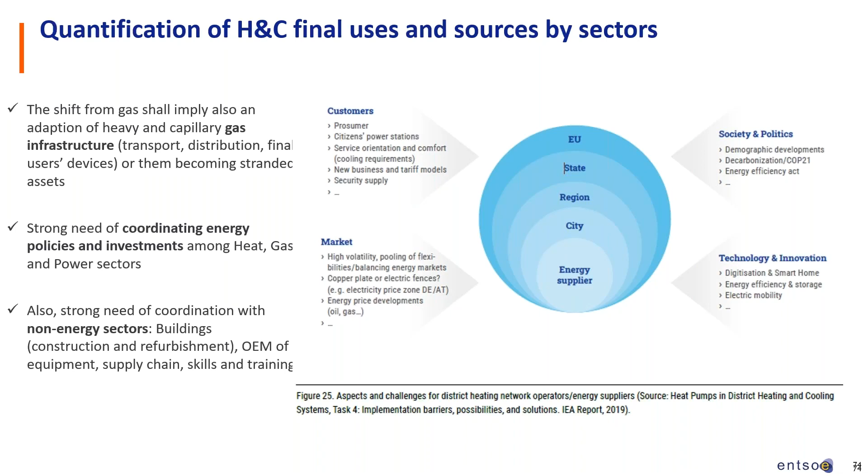We should also look at non-energy sectors like buildings, manufacturers, the supply chain, skills and training. All these points have been touched upon and have to be considered together. It's not easy, the complexity of the system is increasing, and this is the highest challenge, which doesn't give easy solutions. Maybe there is another slide which can be inspiring.

What is the difference between electrification of transport, which is already mainstream, maybe slower in some places but clearly heading that way, and heating? For electric vehicles, there is maturity in the engines, the batteries, and the battery management system, and maybe the missing part of the chain is the charging infrastructure, but the technology for charging is there. Instead, in the heat sector, for example for thermal storage, there is still not full maturity, and we need a lot of innovation there.

Another point is that the decision to go for an electric vehicle is upon the owner of the car, which in most cases, except for fleet managers, is the individual citizen. Instead for heating, you can decide sometimes for your building or your own factory, but some points like waste to heat, district heating, or combined heat and power, depend sometimes on the availability of the surrounding environment for heating. For example, district heating cannot coexist with individual heating, it would not be efficient, so it's a decision by somebody else, the territorial authorities.

In the transport sector, we have a unique interface between electricity and transport, which is physically the charging point, which already has a good degree of standardization worldwide, and some smart-by-design features and devices, for example smart charging, vehicle to grid, and pricing systems. Instead, typically the heat sector doesn't have a standard interface, and the regulatory framework is not well documented, and maybe there isn't even a regulatory or legislative path to this harmonization. So all in all, we have a slower electrification phase.